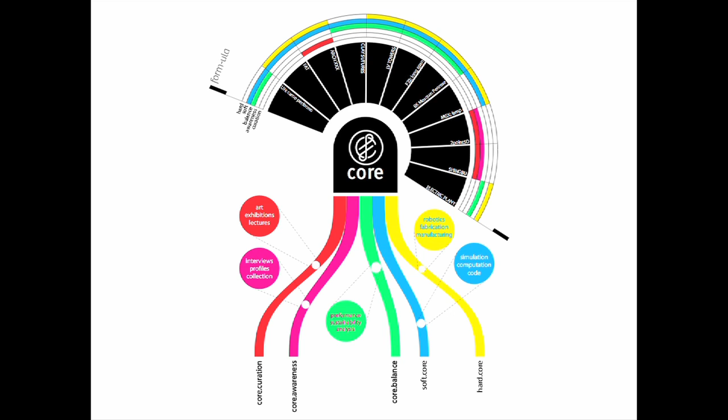Each one of these on the site is our own research sketchbook that we want to expose and make connections with. It's not only a tool within the academic setting, but also within the professional setting—a lot of people use it as a supplement to their continuing education. With each project we walk through today, we somehow position them or view them through these specific lenses.

To step it up further, this has allowed us to produce a very robust network, meaning it's not just a site where information is deposited, but it has allowed us to make connections with individuals—these are just a handful of them.

From the hard core side, these are manufacturers at the cutting edge of solar cell technology, water recycling systems, and other material fabrications that lend themselves to energy, and on the soft core side, software partners. We've been in a wonderful position to take advantage of that and get consultation, and that's really what happens at each of these venues.

The partnerships with Milgo Bufkin, with MGX, with Kuka Robotics, with MakerBot—none of this would have been possible without us establishing the structure of core formula. It's really opened up a lot of doors and a lot of different opportunities, not only within the New York area but even in the world at large.

The first project I'm going to open up here today—I'll be taking the first half of the lecture, and Ajmal will pick up the second. I'm going to talk about two of our built projects.

They're now on display in the gallery next door. The first one is what we call Arch XXX. It's a project we were approached on by an artist, Sheryl Oring. She's a performance artist who sits down at a table and asks people to come to her with questions for the president. She dresses in 1950s garb, uses a vintage typewriter, hand types these letters, scans them, puts them into a book, and sends them to the president.

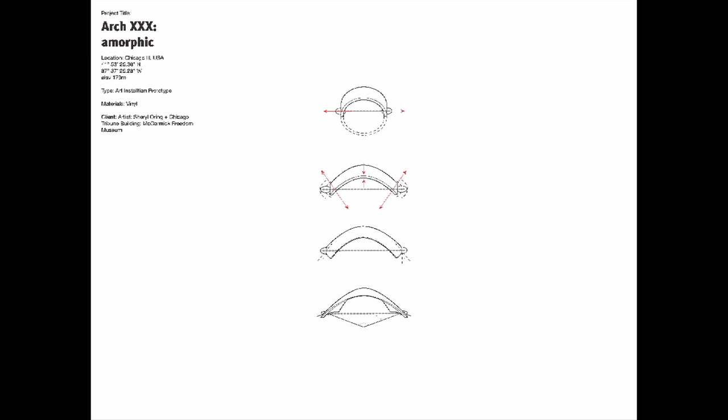Starting off with the cuboctahedron, we have quite a lot of love for this particular piece of geometry. It's extremely facile in space packing. What you're looking at here is an exhaustive two-week exploration of just some of the iterations to begin to see what's the potential of this as a system.

And we finally arrived at what we felt to be the front runner. The way one begins to evaluate this, we needed a unit that would be able to be deployed within a field condition. We consider it almost a 2.5D surface.

In this particular diagram set, you have a male and a female piece. It became extremely important that this, as a new type of brick, one would be able to connect, build, and grow from it without using chemical fastening. So it's a simple tab system.

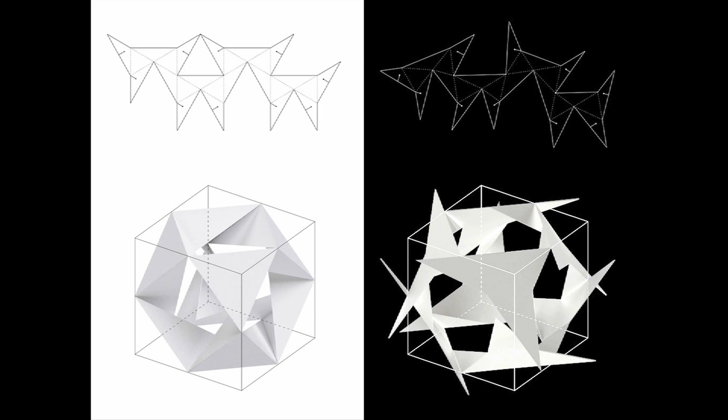This would be a quick prototype of how that as a system begins to grow. And this is the final form of the piece with the distortions you saw on the slide previously. The black and white are the male and female pieces, and there are approximately 3,500 pieces within the entire set.

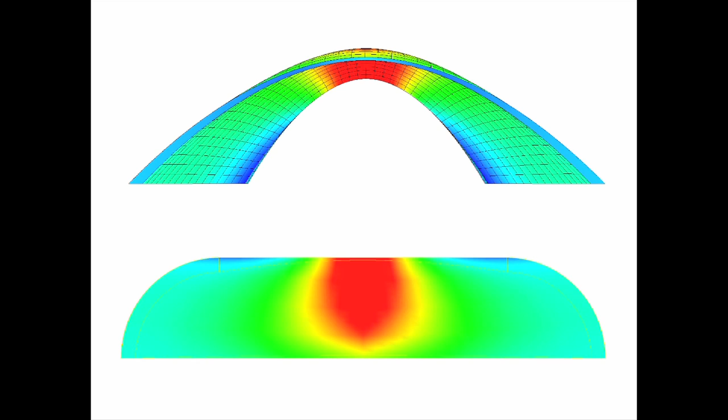What also begins to happen with this as a project, it became a case study to look at material fabrication and how one can begin to embed a degree of intelligence within the system. In this case, the intelligence came about for structural reasons, needing to diminish one's cross-section as you move across. So this is beginning to code that type of information.

These are the close-up shots of the individual pieces, the edge detail, and how it was terminated. This is a shot from the gallery space, or just outside of it.

This was in downtown Chicago, in the Chicago Tribune building, a really wonderful gallery space that had street access. And this is the actual shot of it installed within the space.

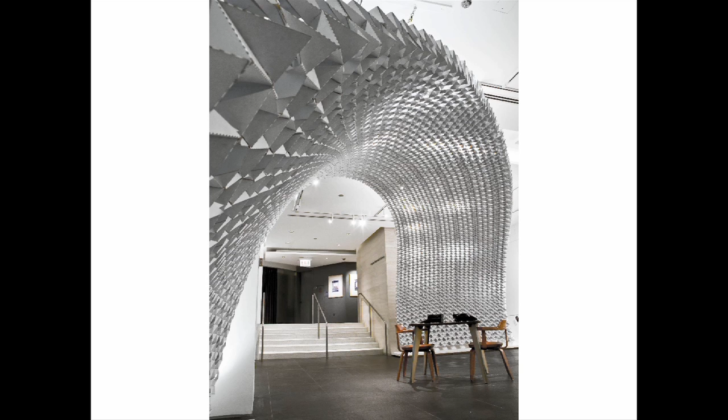You see the table with the dual typewriters on it, and the arch spanning across the space, producing a bridge to begin to hold that as an event.

This is a shot looking from the outside. What you're seeing on the wall is like an echo or a mimicking of the formwork, where each of the individuals that proposed a question to the president has their photograph taken with a small blurb connected to it.

The next project here is Clay Sutures, a three-building apartment complex in suburban Louisville. One of our desires with this project in particular, called Clay Sutures, we wanted to find a way to begin to pinch the landscape, and pinch the landscape with brick.

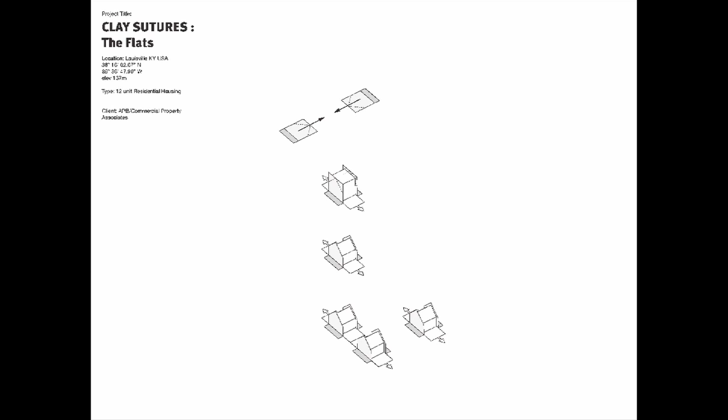There's a seamlessness, or a desire for seamlessness, across the landscape as it moves up a facade, down the roof, and back to the other side. This is beginning to show how that plays itself out, and how it's in turn laid out on the site.

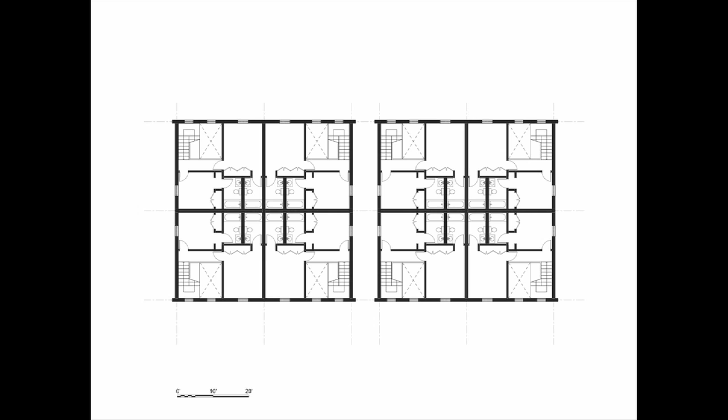The budget for this project was insultingly low. It was a $600,000 construction budget, which means we had to be extremely smart in how one approaches the space planning. So what you're looking at are some very conservative plan layouts that try to condense as much of the services as possible and fight our battle at the edge condition.

What we're also interested in is a certain iconography. We joke that this is a supersized Monopoly house. We're really fascinated with that five-figure line that produces the icon of domesticity from a very early age.

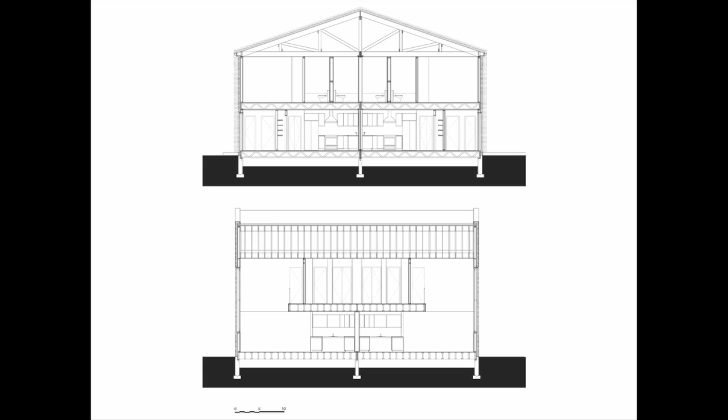These, as jumbo-sized versions of them, even from the point of how and where the brick was selected. You can see in the lower section there, through the center, how within that internal core a lot of the service is concentrated, and it really aerates the perimeter.

So the battle that we decided to fight within this one resides in the surface. The surface in this case came in the form of the brick and the skinning of the two facades and roof. What we've decided to do within the brick is implement a pattern relief that would allow for shading throughout the course of the year.

So this wall became a system that had the ability to reflect and absorb energy. In relationship to ivy, it became a system that in the summer months provided a high degree of protection from the high sun, and in the winter months would recede and allow one to warm and heat the home.

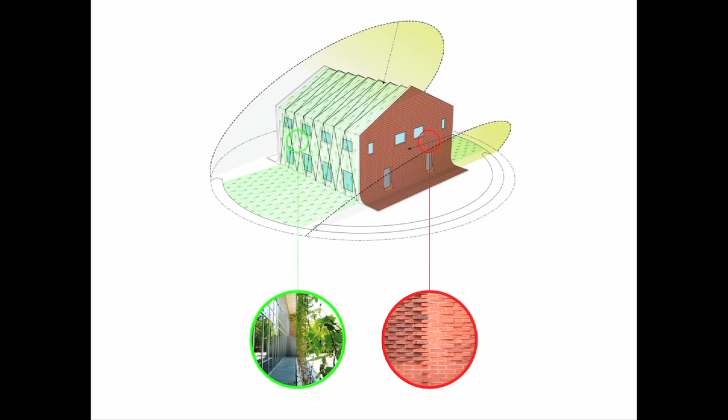These are some of the construction shots from the site and some of the studies we've done to begin to test this. In this case, it's the winter solstice, but it's a relatively simple move that the contractors in Louisville could manage.

This is another shot of the space in its intermediate stage of production. In this case, it's probably going to take two to three years before it actually comes into full detail and matures. I think at that particular intersection we'll be able to assess how it performed and whether all of this was working.

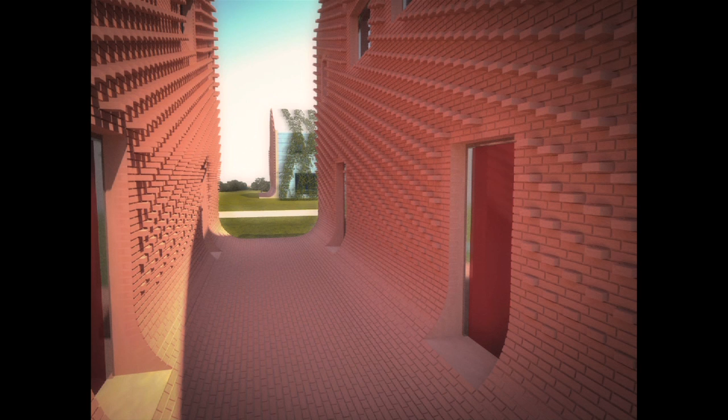This is a shot in between the two buildings looking at the third across the way. You're completely engulfed within this brick facade system that is an end cap terminus.

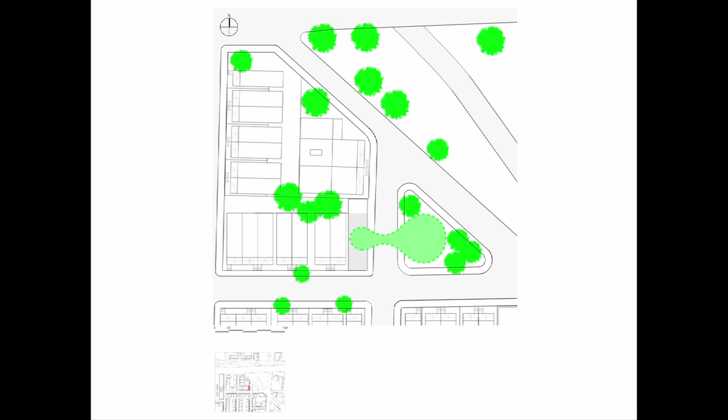For example, on certain days prayer sessions will be conducted, and depending on occupancy, it might go above the capacity of what the building can hold. So we begin to understand how the east facade with the canopy door can become an extension, a way to bleed the private and public program back and forth.

So the people attending the sessions will actually be able to sit in the park, or even close off the street and extend the prayer space, so the landscape becomes more integrated.

Within the traditional mosque, there's a large prayer space at the ground floor, and it called for an uninterrupted floor area. We began by making two architectural moves: the first was to eliminate the columns at the base and replace them with an arch, a more traditional arch.

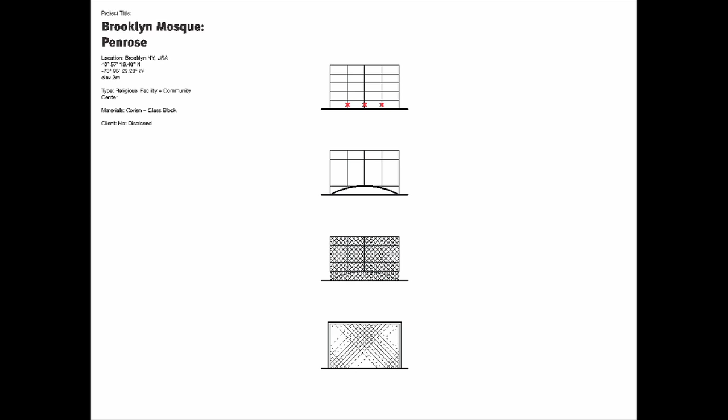The second move was to put a glass veil shrouded with a folded system. That system allowed us to begin incorporating the prayer space as well as the community center.

As you can see on the plan, there's a main prayer space. To the north, we incorporated a stairwell, which was critical because we wanted a proposal where the community center would not be affected by the prayer sessions at any given point.

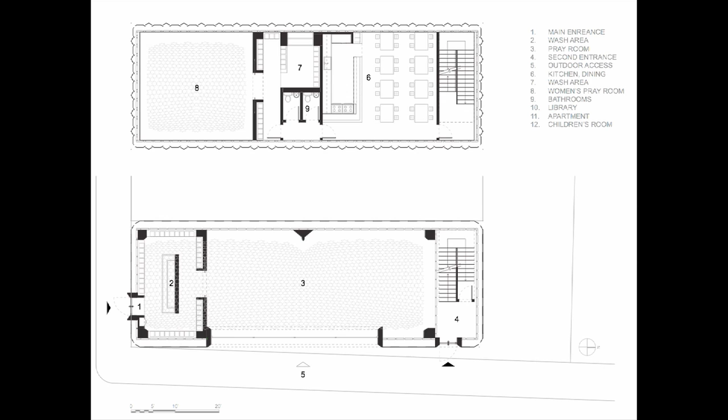By locating it externally on the north side, one can move in and out through all the floors as needed. So on the second floor you have an additional prayer space, a kitchen, a dining space; the third floor has apartments for the imams and a library; and the top floor is a children's space.

In addition to developing a skin system, we began to understand the performative aspects. So you had the cultural aspects on one side, and as Richard pointed out, we are trying to develop a vocabulary both in culture and performance.

In this condition, the double-layered skin allows us to create low pressure and high pressure. The high pressure is obviously as heat builds up and temperature develops at higher levels. The pressure differences cause the warm air to be pulled out through the opening and into the space, helping maintain a relatively comfortable temperature range.

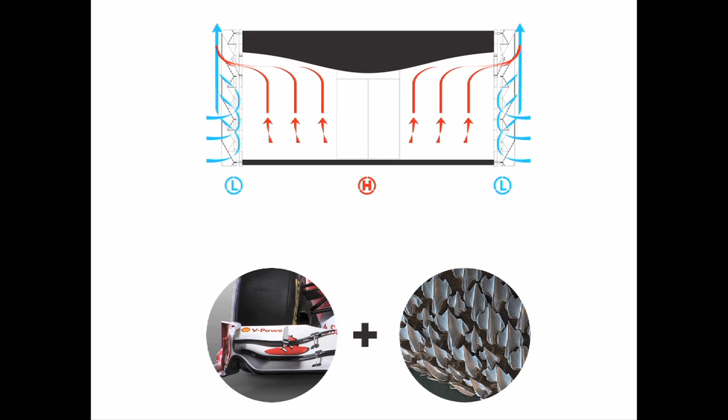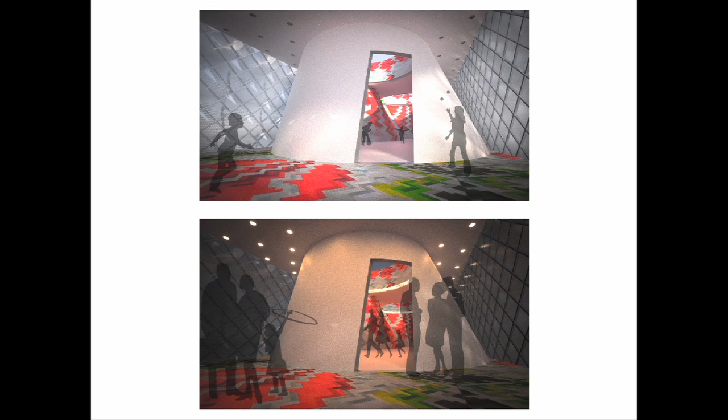An image of the children's space, and a rendering of the prayer space.

This was important. We know the prayer space was the main goal of this building, so we wanted to treat it with a certain level of intimacy and respect, but within that dialogue produce a level of transparency that ties it back culturally, connecting it back to the community.

The second project is the UN building. This project started with a research effort at Pratt. We were interested in post-war architecture and where it could go. We were studying Corb and Mies as some of the figures, but we decided to pull one out in particular: the UN headquarters.

We were interested in redesigning the UN building, not completely, but from its existing condition, pushing it through a new cultural model. For us, the first slide Richard showed was the core.form-ula diagram that states all the different divisions: hardware, software, fabrication, technology, etc. We're interested in pushing the project through that filter.

In 1945, when the building was first completed, there were 51 members and world population was at 2.6 billion. By 2010 that increased to 192 members, currently at 6.0 billion.

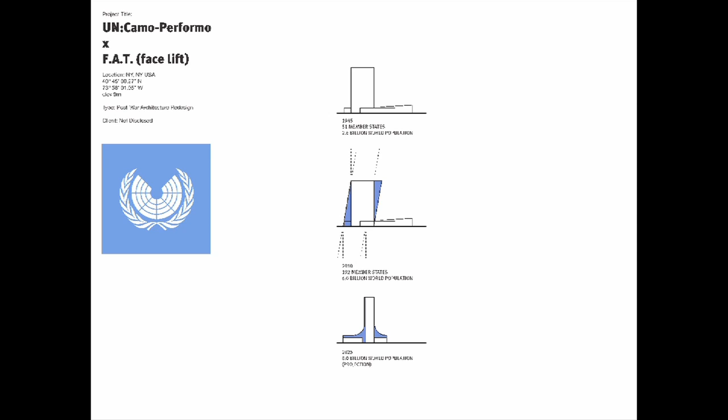We produced two basic moves. One was to produce a slope oblique to the tower by putting two triangles, one at the north and south side. On the west and east, we began to drape the skin. These moves both responded to the need for greater square footage due to population growth, calculated for increasing both programmatic and performative areas.

Just a simple brief description: the UN building is oriented north-south with glazing on the east and west. As an idea this is incredible, but from a performative aspect it's quite troublesome, because the sun rises in the east and sets in the west, so throughout the entire day there's an accumulation of heat.

The occupants are quite uncomfortable, and I think currently they're remasking the surface skin now.

Just a typical section - we're trying to understand how to not only increase the programmatic square footage but also the public spaces. So we are producing a skin that begins to drape the entire campus.

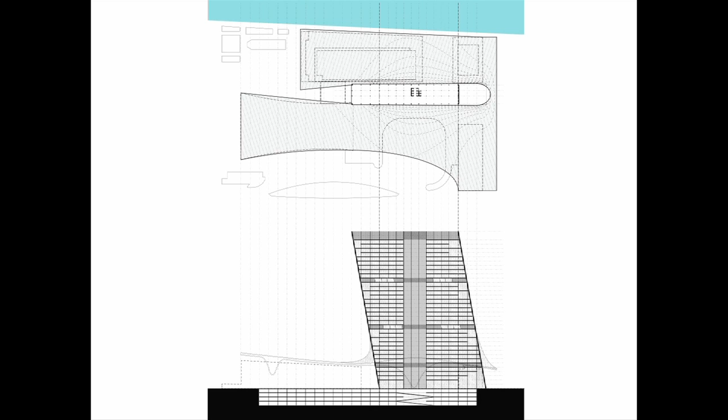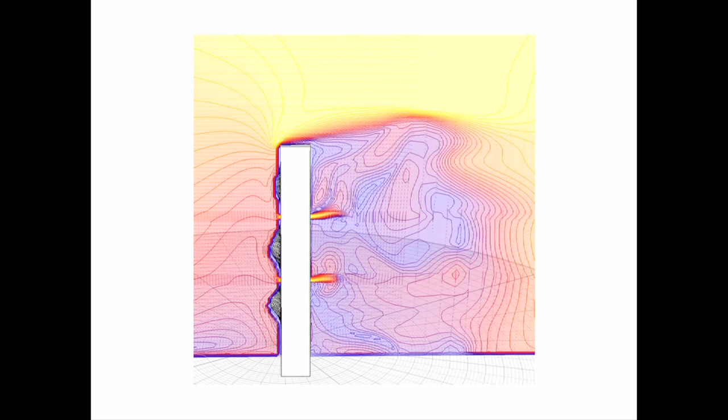This is an image looking at the cross-section of the building with air, CFD, and wind, because the building is oriented north-south, but the west facade is actually oriented toward the northwest, where the prevailing winds come from.

So we're running it through our software packages to understand solar heat gain, the different climates, and the different flows of energy through the site. From this we began to understand two basic moves: a bigger move at the scale of the architecture, and smaller moves at the scale of the facade.

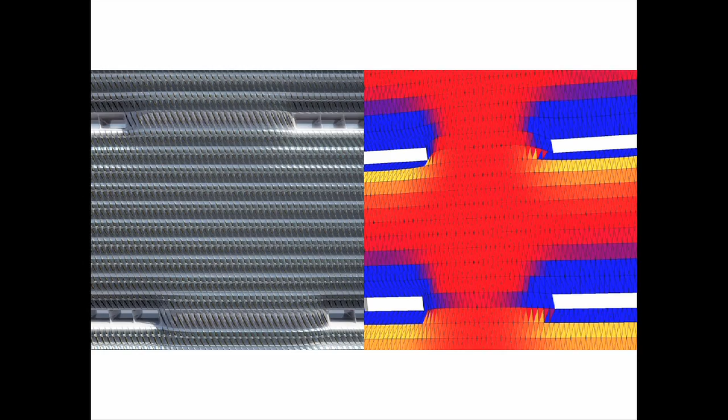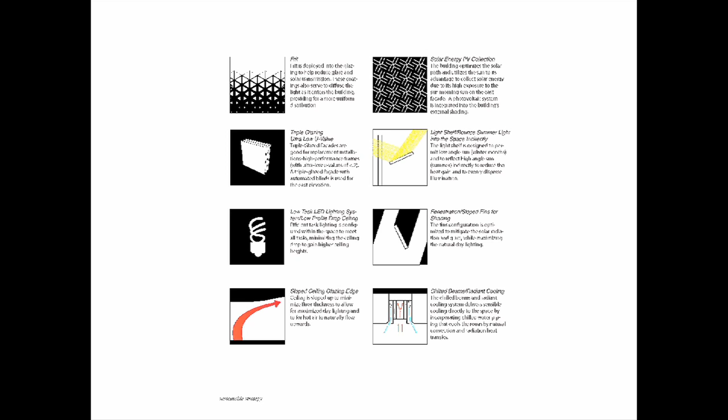At the scale of the facade, we found a simple move we could deploy: understanding solar collection, shading, and redirecting light, all within one basic fin system.

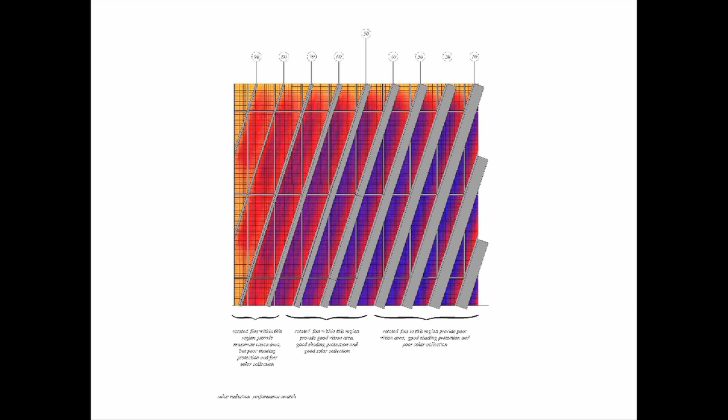We started by looking at a traditional curtain wall system, strong in its vertical and horizontal axis. We supplemented that with a diagonal fin, recognizing the east and west as the main surfaces needing this fin treatment. We zeroed in on an angle that let us both collect and shade.

From that we produced a single ribbon that collects and redirects light through a bounce, and shades, all at the same time without any dynamic controls. We were interested in a very static condition that provided all those functions.

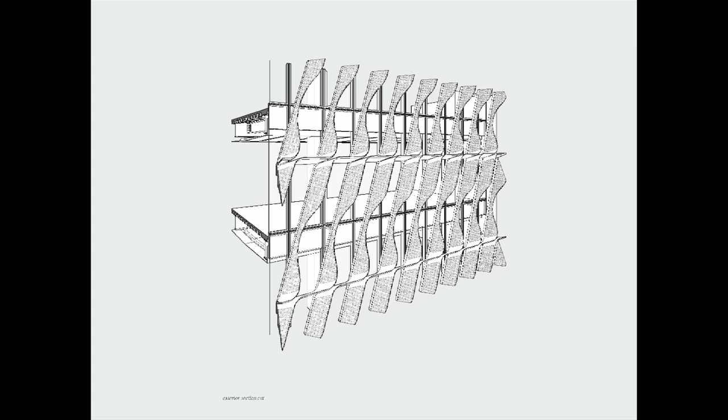In the process we realized we were developing a vocabulary for design, in the sense that we're inflating the skin. Even with the curtain wall, we understood it doesn't have to end where the glass stops - it can grow further out, creating a relationship to the environment. These are some sections and drawings that articulate that condition.

Within this discourse we were interested in fabrication - taking single sheets of metal and understanding how that gets folded, in addition to understanding the assemblages and processes involved.

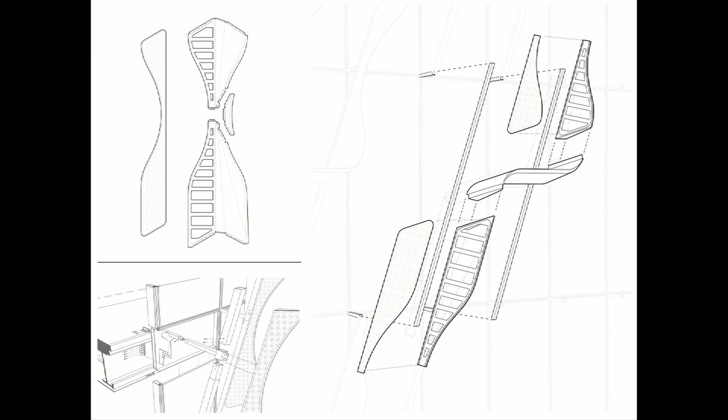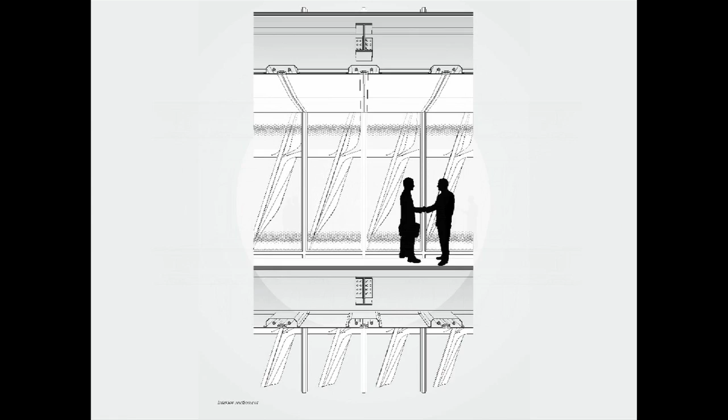Just an image of the cross-section. And how does that begin to interact with the spaces inside? We're talking about a surface idea, but within this process, it's connected back to the space. I think that's the crucial idea we want to get across: that the surface of the building is highly connected to the interior spaces. So if this is facade 1.0, the electric plant is facade 2.0.

I think we're slowly realizing what it means to begin to prototype your idea and your design. In this particular case, this is a building out in LA, where it doesn't rain very much—probably 10 to 20 inches on a good year, where other cities relatively get more, three times as much.

So the strategy here was to understand the big cross-sectional move as well as the small cross-sectional move within the facade. The larger cross-sectional move—the first thing we did was begin to produce voids within the building. These voids increase the exterior condition for the building.

Within this project, there's a sense of urgency to minimize the distance between the occupant and the outside world. So by bringing nature closer to the occupant, you're now producing a more comfortable, constant temperature or environment.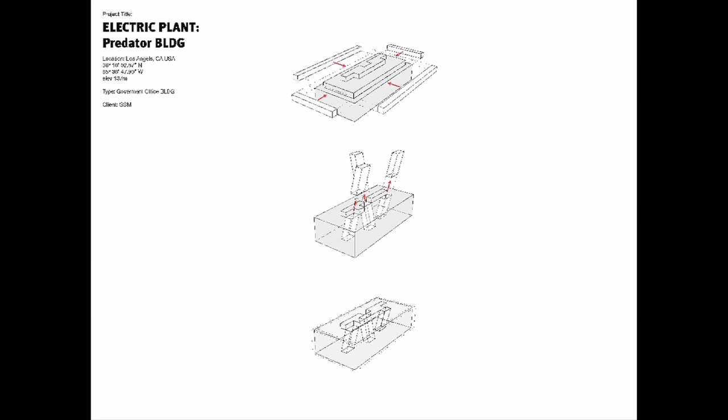In this particular case, there was a very large governmental building in existing condition, which had a relatively small window aperture, tinted glass, which equated to poor lighting and massive mechanical systems to cool the space. We saw that as an opportunity to propose a solution. We approached it by looking at the sun, water, and plant life.

Within all this, we're interested in one main running theme, which is harvesting. How can we begin to harvest energy? How can we begin to harvest water? How can we begin to increase the quality of natural daylight?

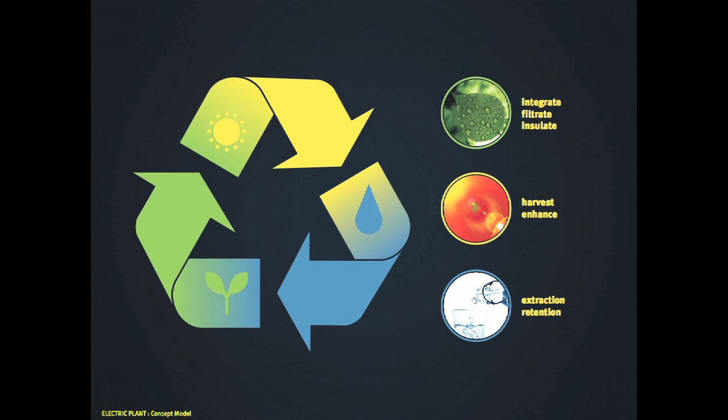We went through many ideas, but we ended up with a big cross-sectional design move, which is to produce the voids and to produce what we call existing technology called the living machine.

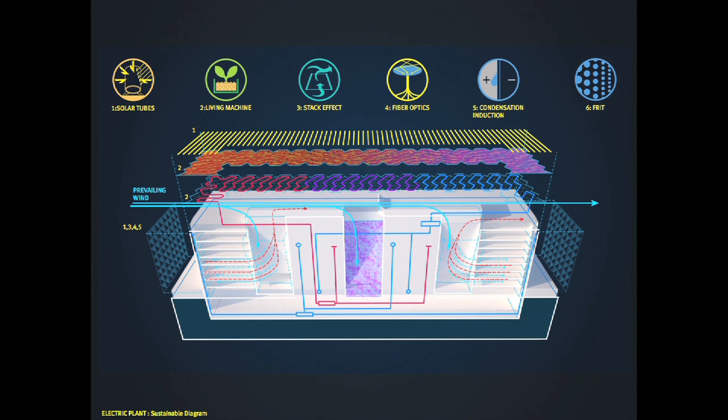So if I move fairly quickly here and just try to express what we're trying to get across, yes, we looked at many technologies, but at the end of the day there's one underlining theme here, and that's to inflate the skin.

I'm not going to spend time here, but just go directly into the facade. In this particular case, we broke up the main glass panel into two: the upper portion being more of an engine that provides solar or captures solar energy and UV rays, while the lower half is about water harvesting.

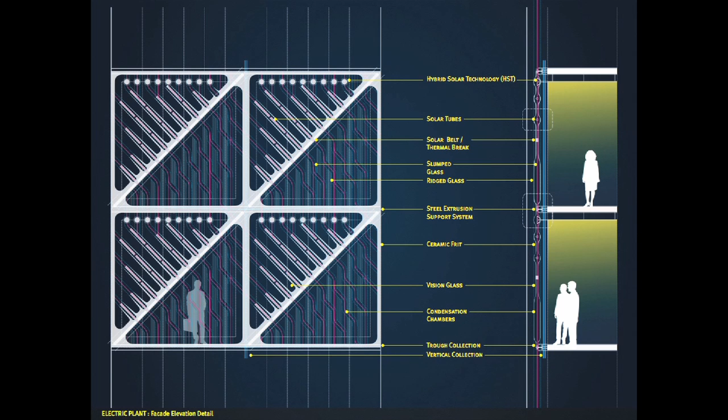Now, if you look through the cross section, we're interested in inflating the skin, but embedding it and injecting it with technology again. Within the system, as you can see here in the lower half, we recognize that there's a great deal of moisture in the air, and if we begin to understand technology, we can begin to harvest that water from the air.

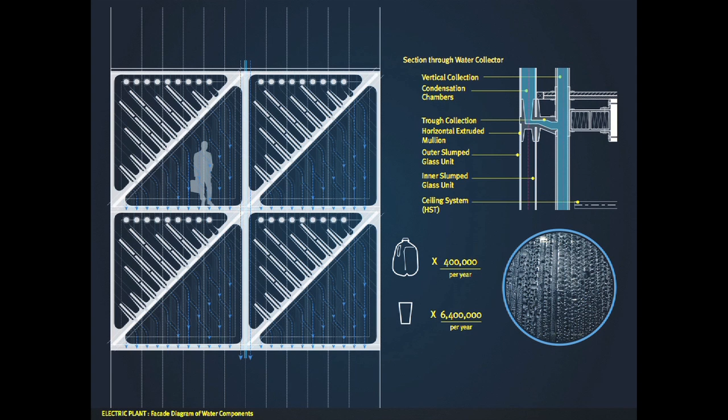It's a very simple process of inducing condensation on the surface. So through this very simple system, we are now able to incorporate water into the facade. That's a big sort of wrong step in direction typically from most people, but we were quite confident that we could begin to bring water into the facade and harvest it.

The second move was to begin to deploy solar tubes and hybrid solar technology. The circular dishes along the top provide natural daylight. It takes UV rays from the environment, redirects it into fiber optic cable, and through that fiber optic cable we can go 50 feet into the space.

You see this reflective ceiling here, and it emits natural daylight. This cycle can occur literally past sunset. So you're not taking solar energy, but you're taking UV rays, which are quite abundant.

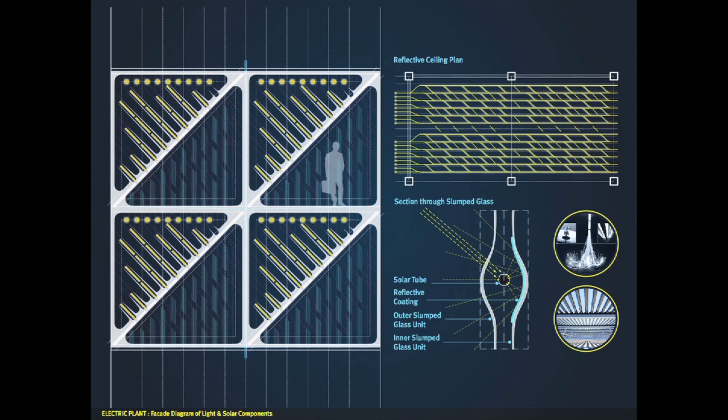In addition, the tectonic quality of the slumping glass enhances the idea of a solar tube by using the slump and its curvature to recalibrate the focal point of solar rays. So it's all about geometry, integrated geometry and performance when it comes to this facade.

We recognize that LA is one example, but I think as we design and move forward, we want to begin to understand what it means to reposition this. What does it mean to reposition in New York versus Los Angeles, and what gets recalibrated? How does that system begin to readjust itself?

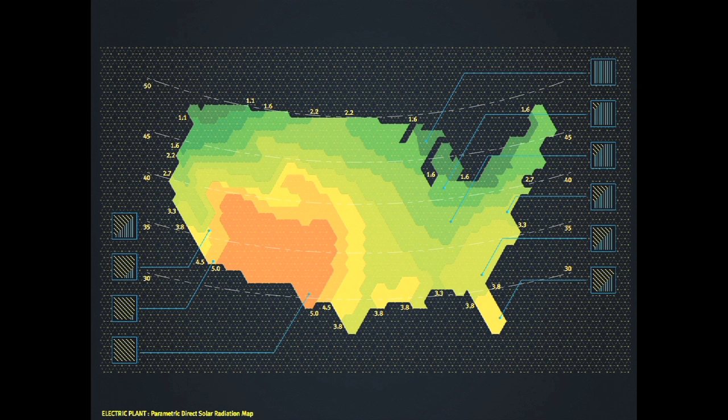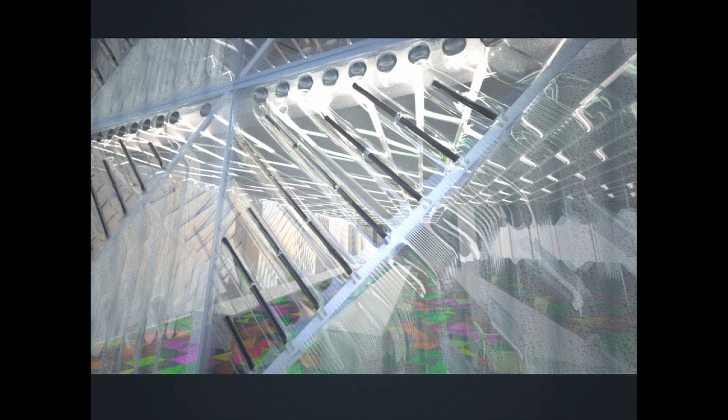So this is just a typical rendering. And I think as we are producing these renderings and producing these prototypes, yes, we are starting at the skin. The skin is sort of the area where we can begin to produce that dialogue with the environment. I think those are the design opportunities we want to take advantage of, but not necessarily stay.

So we're very much interested in how the surface affects the volume. And I think throughout our practice, this is something we're going to be challenged with as we move forward. I think that's the last slide. Thank you very much.